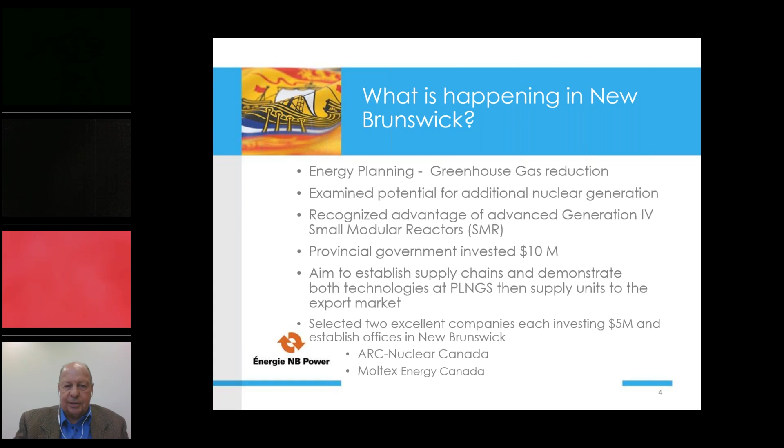The next slide shows some of the activities that have been happening in the two years since. The vendors have set up offices here in Saint John, New Brunswick, and have progressed various aspects related to their project planning through to design, research and development - some of which is being done here at the University of New Brunswick - and also going through the Canadian Nuclear Safety Commission's vendor design review process. One of the key and exciting things is the supply chain assessments they've done in terms of the potential capabilities of manufacturing components and modules right here in New Brunswick.

Engagement is also a very key activity, and they've been very involved with that as well. NB Power has been working alongside these vendors, both in our own project planning and in looking at what additional environmental studies may be needed. We've been very engaged in engagement, and I'd like to talk a little bit more about that on the next slide.

We believe it's very important to begin engagement activities very early. So while we do not have a specific project declared, it is important to get out in front and talk to communities, such as our First Nations, surrounding communities, and organizations right across the province, so they can understand what we're considering, what the benefits are, and so that we can hear and actively act on the feedback we're getting.

What's interesting about waste, as Paul mentioned, is that the public is looking for safety, being safer. Our little reactor is safer. The public is also concerned about waste, and our little reactor deals with waste in a number of ways.

If you compare a typical CANDU reactor today at an equivalent amount of energy, it would produce somewhere around 20,000 used fuel bundles, whereas our reactor is only fueled every 20 years, compared to the CANDU reactor being fueled 4 or 5 times a week. So in 20 years, we would only produce the equivalent of 184 CANDU fuel bundles. And we can reconstitute, meaning essentially recharge, and then run another 20 years with 184 CANDU fuel bundles, and recharge again and run another 20 years. So we get 60 years lifetime out of these little reactors, but the waste reduction is significant.

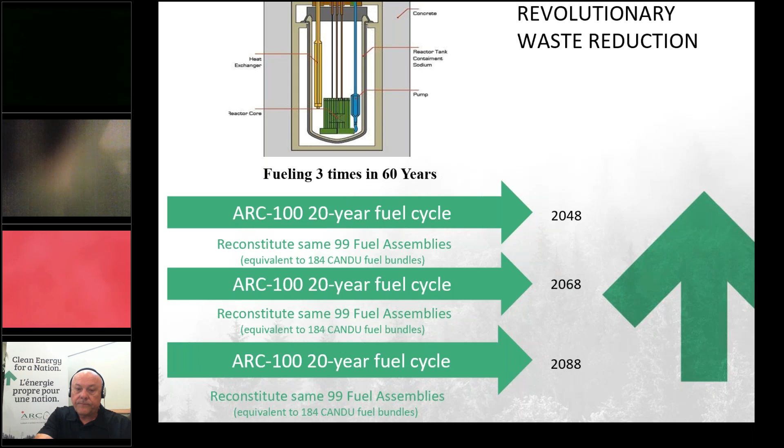That's what's key to the ARC technology—it's proven, it's inherently safe, and it does a lot with waste reduction. That's the whole approach we've been talking about.

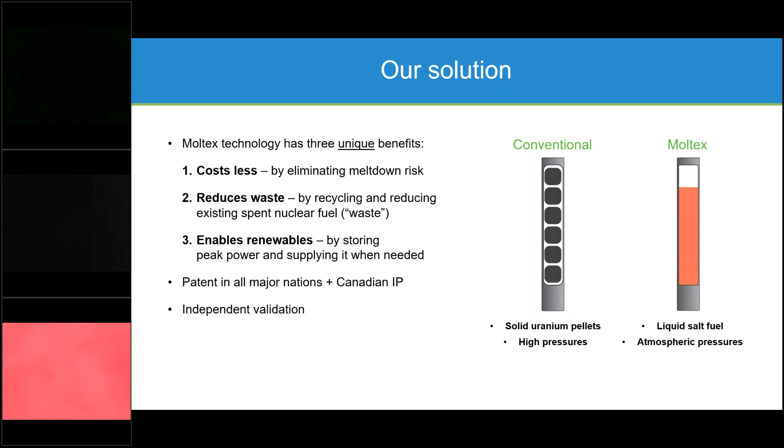How do we enable more renewables into the grid? We know that solar and wind power sometimes generate excess energy that cannot be used by customers. Our technology has intrinsic capability of storing electricity or heat into our reactor. So when you have excessive energy from renewables, we can store it, and when you have a peak load requirement from the customer, we can release that energy very fast. So with Moltex technology into the grid, we actually can enable more solar and wind power.

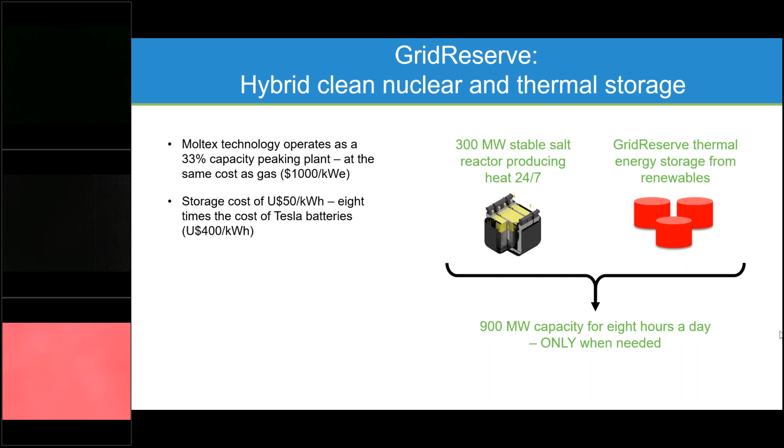Next one please. One of the barriers from the public point of view of developing nuclear energy is the waste - a lot of people don't like the idea of burn it and bury it, what we call a once-through fuel cycle. We're actually doing a closed fuel cycle. With Moltex technology, we're not going to burn fresh uranium from the mine and generate nuclear waste - we're actually burning the existing waste created by CANDU reactors over the past 30, 40, 50 years, generating electricity without generating additional waste. So that will in fact reduce the existing legacy waste.

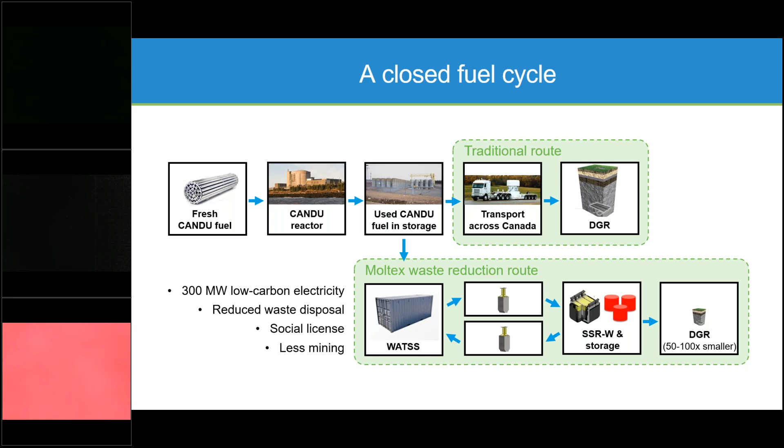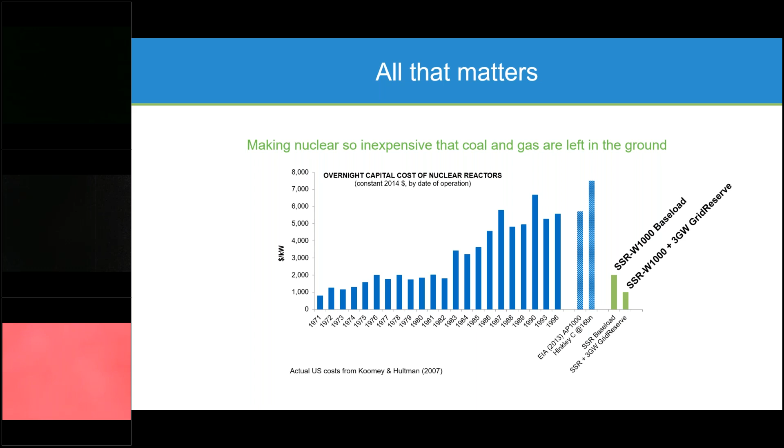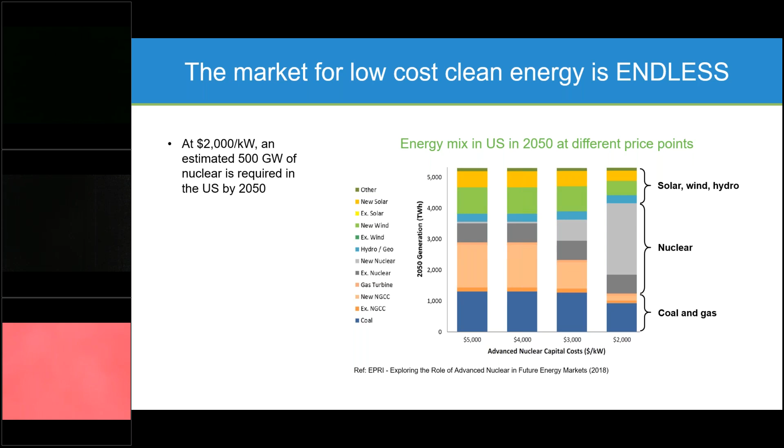So what's going on here in New Brunswick? We have partnered with NB Power and the government of New Brunswick to build our first reactor in New Brunswick, working with NB Power and the University of New Brunswick to develop this technology in the province. UNB plays a very important role in our technology development.

We have been working with Professor William Cook and his team at UNB, and they're setting up a nuclear technology research center in Fredericton. In the long run, this technology can be developed by the faculty and students of the university, which also gives us a long-term competitive edge because the technology is developed in the local community.

At this time, we have an office of 15-plus staff members in Saint John, and we're also working with our partners across the province to get the work done. We've been working with companies in Saint John, Fredericton, and Moncton, and they've been helping us a lot with engineering and research activities.

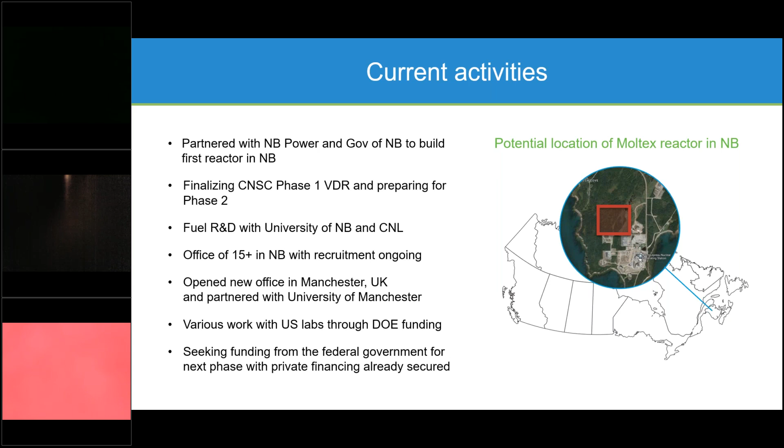We're very thankful to the government of New Brunswick and NB Power for their vision and determination to lead the next generation nuclear technology development in Canada. It is our commitment to the province that we're going to try to establish an R&D and manufacturing hub in the province.

Our strategy is to look New Brunswick first. We always look for manufacturing, R&D, and engineering capability in New Brunswick first, then we look into Canada, and then we look at the rest of the world.

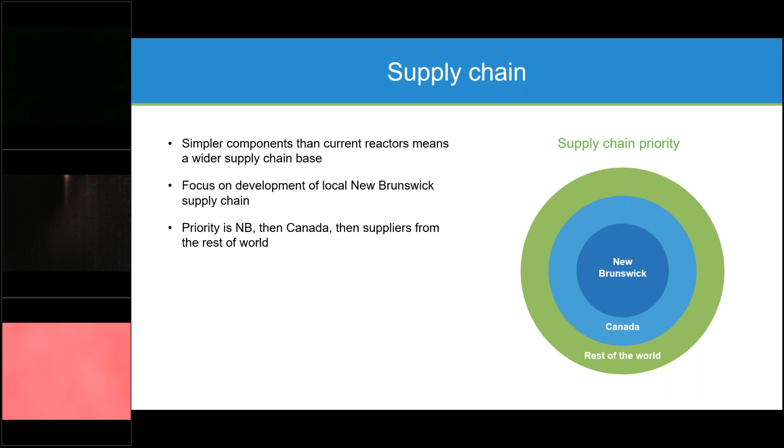Last year we did a supply chain analysis, and it showed that we can actually manufacture 46% of the components in the province without spending too much investment in the capabilities. If we want to invest more, we can manufacture even more items in New Brunswick. And this is only for manufacturing of components.

We have already started working with engineering service companies across the province to support us on the technology development side. Overall, we expect that our activity in the province can involve a lot of larger or small companies, or even individuals in the community.

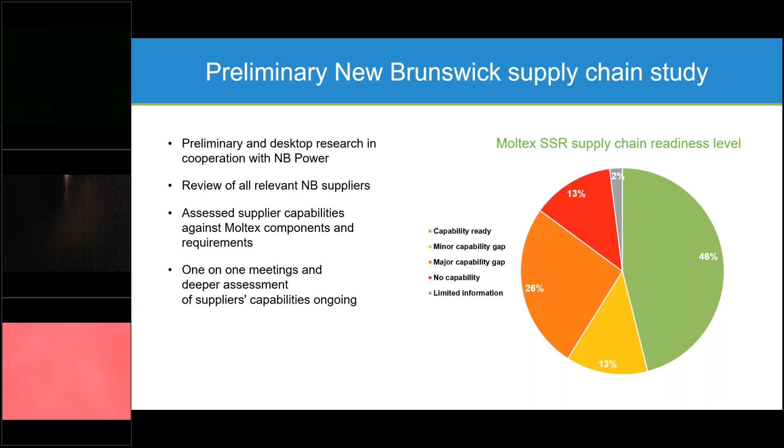As I mentioned, our technology provides a low-cost clean energy solution while reducing nuclear waste and enabling more renewables. Our current activity in New Brunswick and other countries has demonstrated strong support and momentum, both from governments and the private sector. New nuclear in New Brunswick, we believe, can play a major role in clean economic recovery post-COVID-19. We intend to put the NB supply chain first.

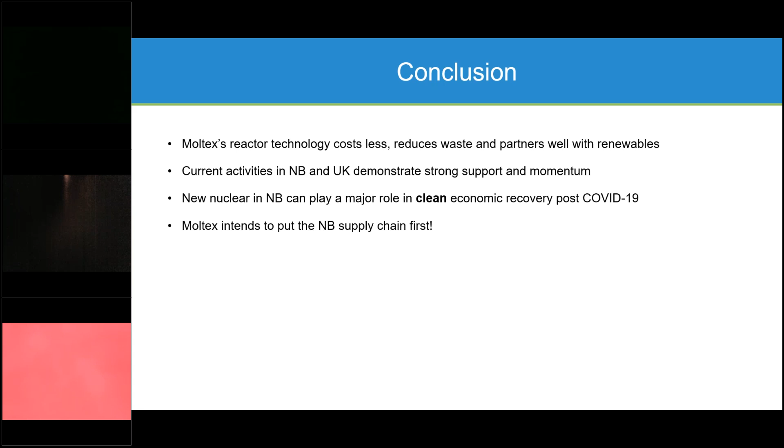If you have any questions about our technology and what we can do for the climate and for the community, please do not hesitate to contact me. And if you have any questions or interest in our supply chain opportunities, please contact our supply chain manager, Ivan. Thank you very much.